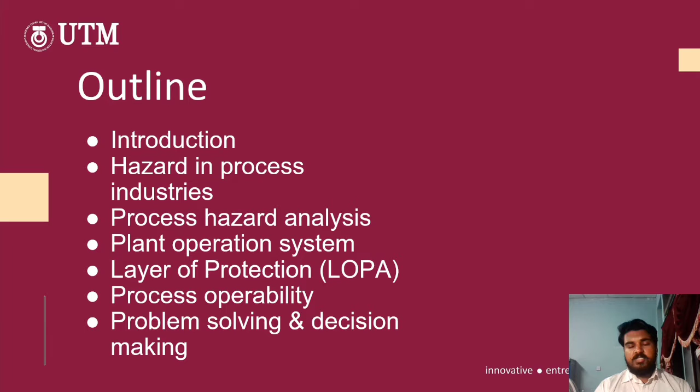The title for our project is the Torrance Refinery Explosion from ExxonMobil, and my group members are Logiswaran, Rohini, Tanweer and Sitinur Khaliza. This is the outline for today: I'll start with the introduction, followed by hazards in process industries, and lastly we'll end with problem solving and decision making.

For the introduction, the ExxonMobil Corporation was developed on November 30th, 1999. For starters, ExxonMobil focused on chemical-based products such as artificial rubber, catalysts, synthetic automotive oil-based stocks, and many more. Once further developed, ExxonMobil also started to produce jet fuel, diesel fuel, LPG, coke, and sulfur as well. The Torrance plant of ExxonMobil is actually the second smallest refinery worldwide.

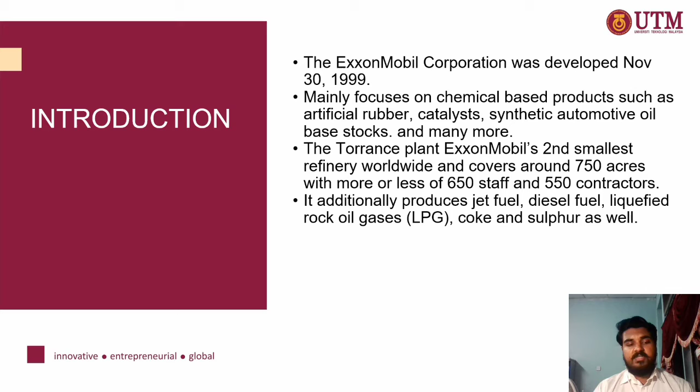It also covers around 750 acres with more or less 650 staff and 550 contractors working in that plant. This is the event timeline for the explosion.

The actual explosion took place on February 18th. However, the timeline initially started on February 11th. One of the expanders in the plant experienced a severe vibration problem, and the following day they cleaned the expander blades because they thought the catalyst buildup was causing it, so they removed the catalyst buildup.

However, the following day the expander had a similar problem, and this time they cleaned the blades, but unfortunately it did not reduce the vibration. On February 16th, the process flow through the expander was increased, which caused the vibrations to become worse, until it reached a high set point, and the FCC unit automatically shut down into the safe park.

This caused the catalyst inside the expander to not form a protective barrier, and the steam flow into the reactor is basically only a barrier to prevent the hydrocarbon from entering the air side of the unit. The following day, on February 17th, the ExxonMobil personnel decided to reuse the variance which was developed for the 2012 expander entry.

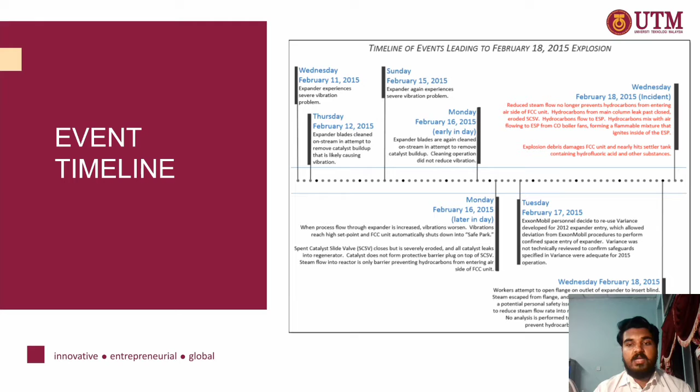Lastly, the explosion debris damaged the FCC unit itself, and it also nearly hit the settler tank containing high amounts of hydrofluoric acid and other substances as well.

Hi, I'm Khaliza, and I'll proceed with the hazards in process industry at the ExxonMobil refinery, Torrance, California. Next is the types of hazards involved in the accident, which are fire, explosion, toxic release, and physical. Fire can be produced from electrical sparks, known as one of the ignition sources, and this plant has very high potential to produce fire due to the process used to separate particles in the electrostatic precipitator.

For the explosion, it happened due to the back flow of hydrocarbon into the reactor, where the hydrocarbon mixed with the ignition source, the spark, producing the explosion. For the toxic release, due to the explosion, some debris of the ESP, or electrostatic precipitator, was found near the FCC and alkylation unit, where some of the toxic chemical, known as hydrofluoric acid, could be released.

Due to improper installation of the blinds at the reactor, this was the main factor causing toxic hydrogen sulfide to be released to the surrounding area. Due to the accident, 4 employees were injured, and due to the toxic release, it endangered nearly 150,000 residents due to chemical exposure.

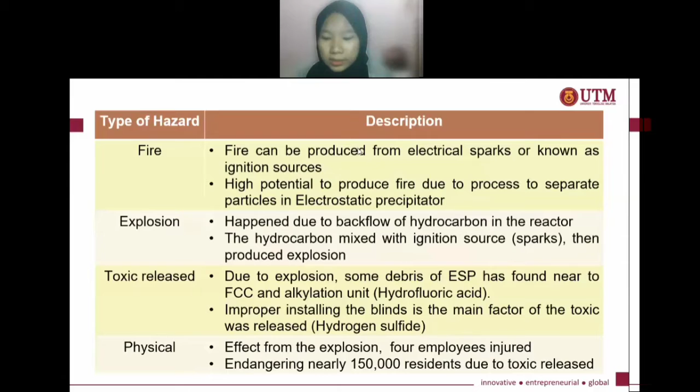So next, as you can see here, this data was generated using the Aloha software. For the IDLH, which refers to immediate danger to life or health, hydrofluoric acid has the lowest value at 30 ppm compared to hydrogen sulfide, and this is very dangerous. If you inhale the chemicals, it might cause death or serious injury. As shown at the bottom of the table, hydrofluoric acid is noted as very dangerous, as it can also react with water or water vapor. So that's all for my part.

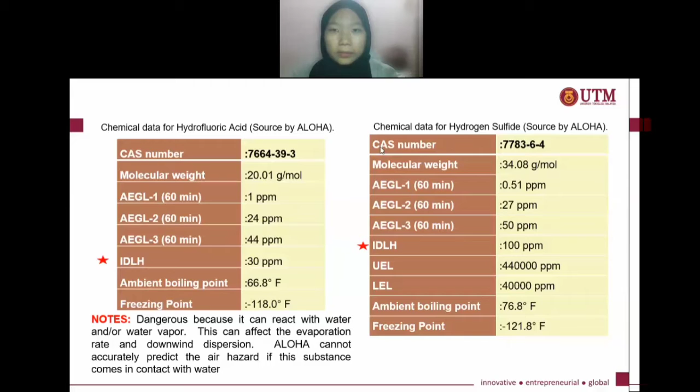Perform process hazard analysis on the ExxonMobil Torrance Refinery facility. Identifying dangers and hazards is fundamental for guaranteeing a safe design and operation of a system or unit in process plants. Process hazard analyses are essential for assessing the consequences of incidents, assessing the risks involved, and selecting the most appropriate preventive and protective systems.

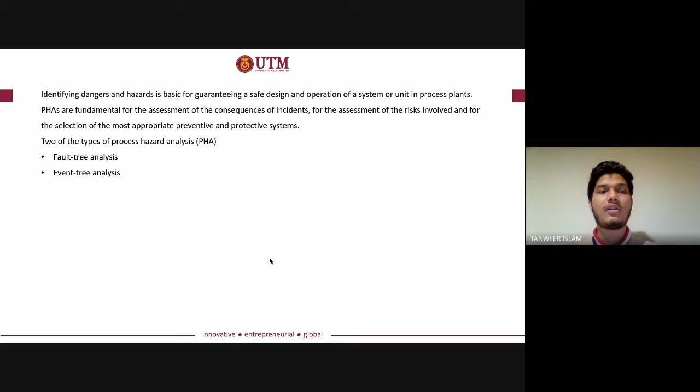Two types of process hazard analysis we are performing today are fault tree analysis and event tree analysis. For the fault tree analysis, as shown in the diagram, the explosion or ignition of the ESP occurred due to both air flowing from the CO boiler fans and the leakage of hydrocarbons through the eroded SCSV through the air side of the FCC unit.

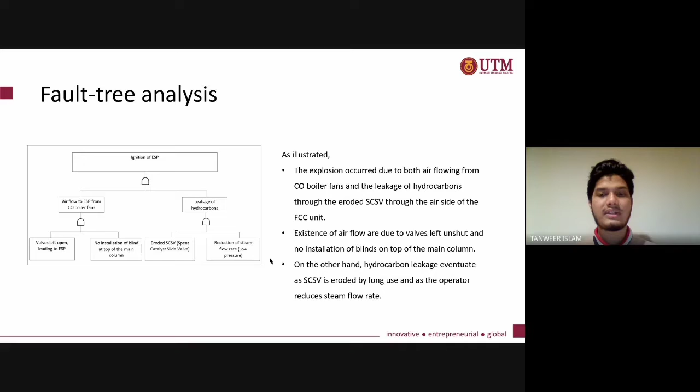Existence of airflow is due to valves left unshut and no installation of blinds on top of the main column. On the other hand, hydrocarbon leakage occurs as the SCSV is eroded by long use and as the operator reduces steam flow rate.

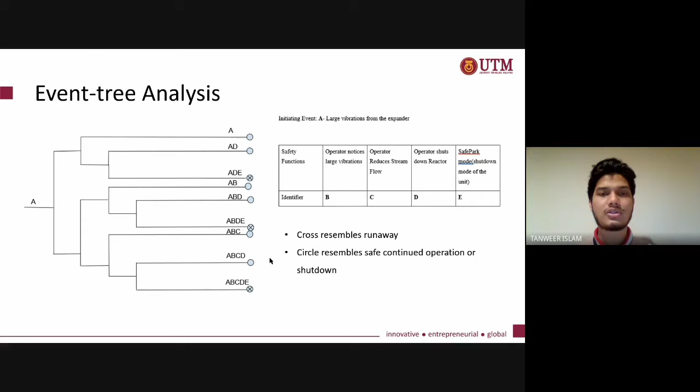For the event tree analysis, the initiating event considered is the large vibration from the expander, denoted using A. Identifiers B, C, D, and E are used for different safety functions as written on the table. As shown in the diagram, we have a possible number of consequences where a cross resembles runaway, and a circle resembles safe continued operation or shutdown.

A HAZOP case study has also been performed on the Torrance Refinery, specifically on the reactor and regenerator, where the parameters are similar, but for different guide words, deviation, possible causes, and actions are found. Similarly, a HAZOP case study has also been done on the expander and the gas catalyst separator.

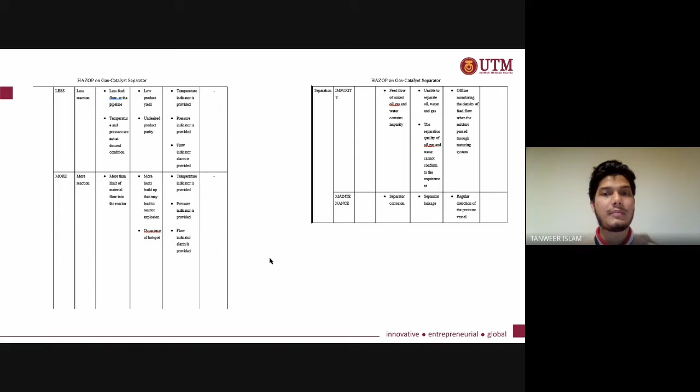For the HAZOP case study on the gas catalyst separator, the parameters chosen are flow, temperature, pressure, reaction, separation, and impurity and maintenance, where each of these will cover the deviation, the possible causes, and the consequences, along with the recommendations.

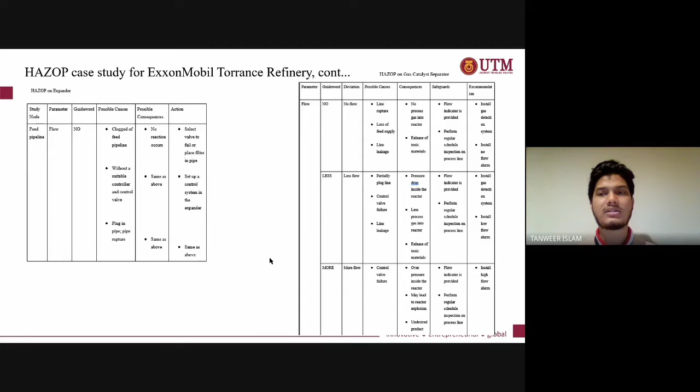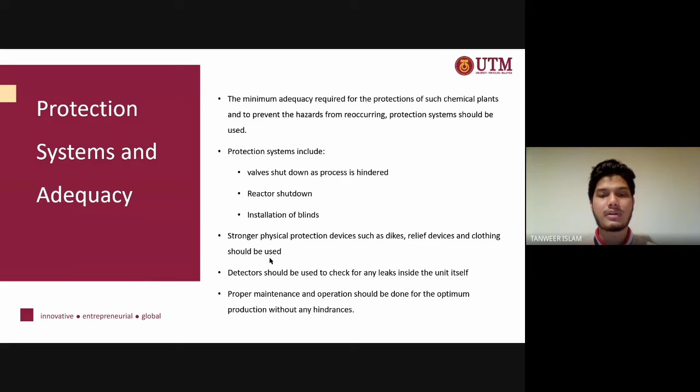The process of the FCC unit begins by feeding the reactor with heavy hydrocarbons, which then mix with catalyst. As the feed travels up the reactor, the heavy liquid hydrocarbons are converted into lighter hydrocarbon vapors. At the top of the reactor, the lighter hydrocarbon vapors are separated from the catalyst and then flow to the main distillation column. Meanwhile, the catalyst falls down from the side of the reactor through a slide valve into the regenerator.

During the reaction, a layer of carbon called coke, which forms on the catalyst, must be removed. In the regenerator, the coke on the catalyst is burned off with the addition of air. Finally, the catalyst is fed back to the reactor through the slide valve and the cycle is repeated.

On the other hand, it is critical that the flammable hydrocarbons in the reactor do not flow into the air side of the FCC unit because it might create an explosion. This is due to the presence of the electrostatic precipitator (ESP), located in the flue gas system. The ESP removes small catalyst particles using static electricity and will create sparks, a source of ignition, when being re-energized.

Due to the hazard potential, the system uses two slide valves connecting the reactor and regenerator to maintain the catalyst barrier between the equipment.

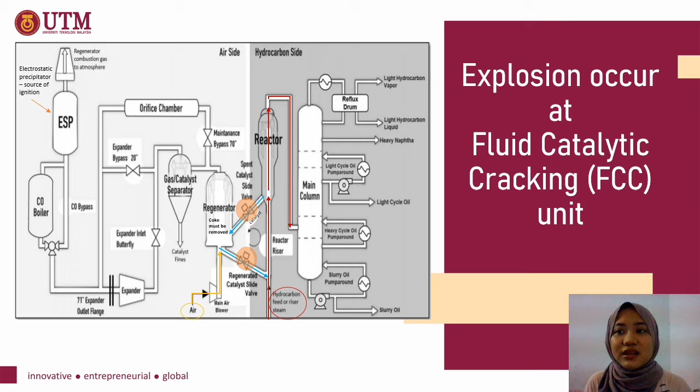The refinery system had implemented a safety shutdown system called SafePark, which automatically activates when an expander suddenly vibrates forcefully in the FCC unit on the day of incident. During SafePark mode, the flow of hydrocarbon into the reactor is turned off automatically, and then the flow of air into the regenerator is also stopped.

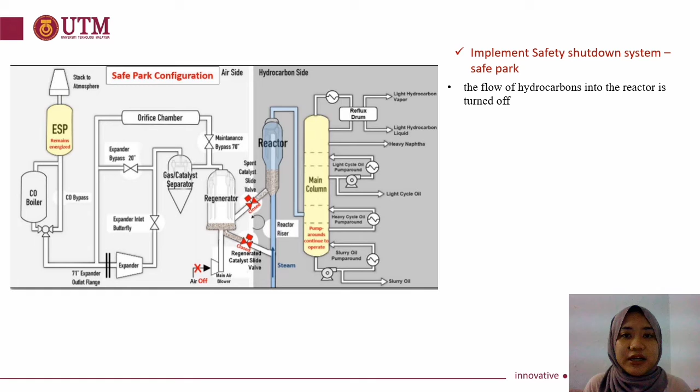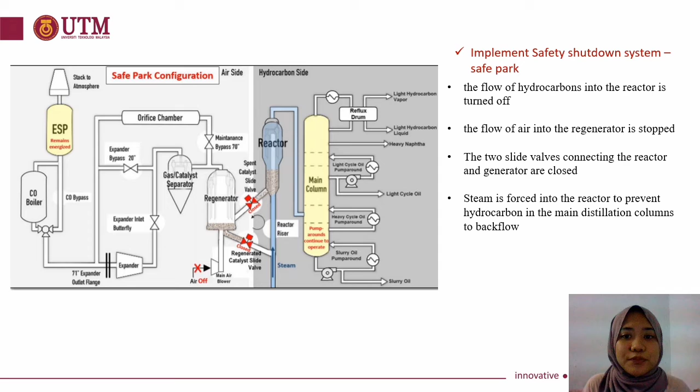The two slide valves connecting the reactor and generator are closed to ensure the catalyst barrier is maintained, and steam is then forced into the reactor to prevent hydrocarbon in the main distillation columns from backflowing. The ESP remains energized during safe park mode.

However, due to the function failure of one slide valve, which had eroded over 6 years of operation, the system could not maintain a catalyst barrier in the reactor. The valve failure allowed hydrocarbons to flow into the air side of the FCC unit, causing the explosion.

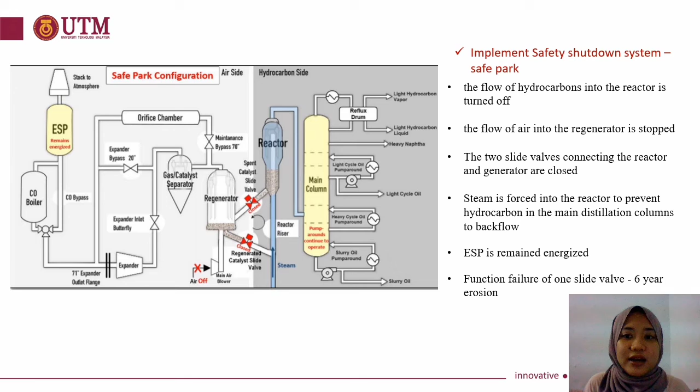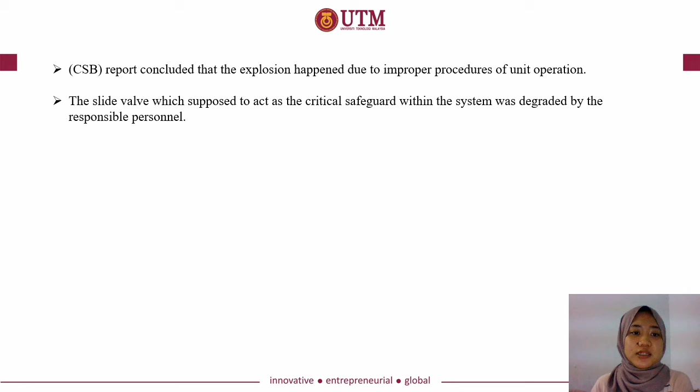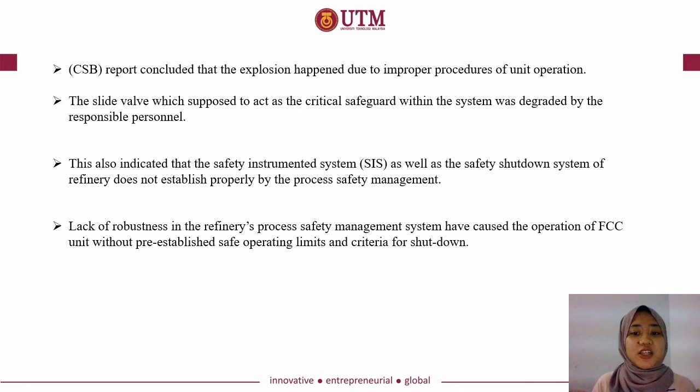The Chemical Safety and Hazard Investigation Board report concluded that the explosion happened due to improper procedure of unit operation. The slide valve, which acts as the critical safeguard within the system, was degraded by the responsible personnel. This also indicates that the safety instrumented system, or SIS, was not established properly by the process safety management. The lack of robustness in the process safety management system caused the operation of the FCC unit without pre-established safe operating limits and criteria for shutdown.

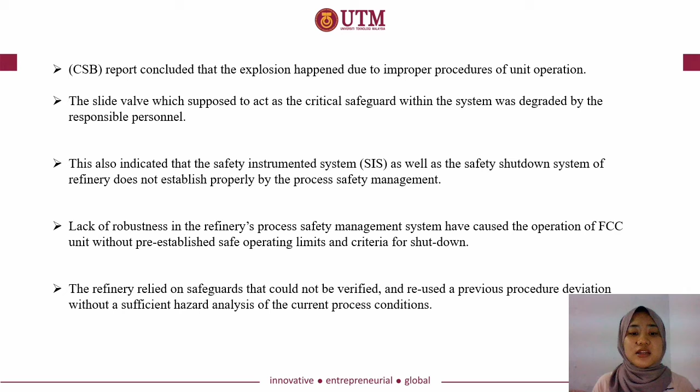And lastly, the refinery relied on safeguards that could not be verified and reused a previous procedure deviation without sufficient hazard analysis of the current process condition. That's all from me, thank you.

So now we are moving on to the layer of protection of ExxonMobil-Torrance Refinery. Let's see the available layers of protection at the incident site.

The first layer is the spent catalyst slide valve, which controls the spent catalyst flow into the regenerator. The next is the regenerated catalyst slide valve, which controls the flow of hot catalyst to the reactor riser, where it contacts, heats, and vaporizes fresh heavy hydrocarbon feed to begin the cracking reaction.

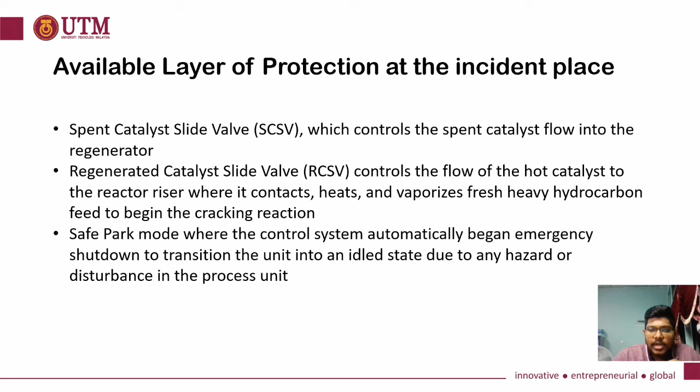Next is safe park mode. This is the mode where the control system automatically begins emergency shutdown to transition the unit into an idle state due to any hazard or disturbance in the process unit.

The occurrence of the explosion was not caused by the inability of the layers of protection installed in the refinery, but instead by the weakness in the ExxonMobil-Torrance Refinery's process safety management system.

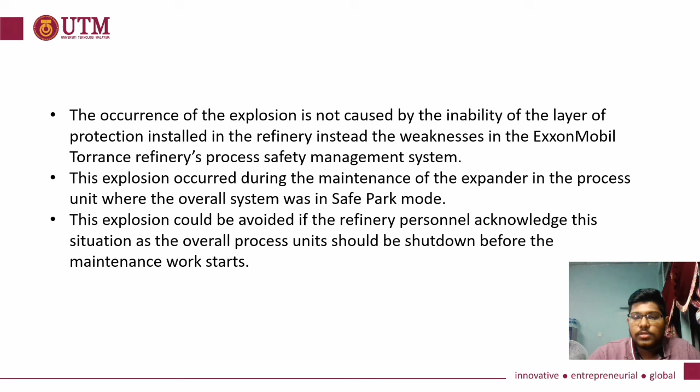This explosion occurred during the maintenance of an expander in the process unit, where the overall system was in safe park mode. This explosion could have been avoided if the refinery personnel had acknowledged the situation, as the overall process unit should be shut down before maintenance work starts.

So what improvements should be done? The layer of protection of the refinery was not the cause of this explosion, but the negligence of the higher authorities. The refinery personnel should be more aware of the conditions of the process unit, and regular checking of equipment should be done to make sure the equipment is in good condition.

The employer should document that equipment complies with recognized and generally accepted good engineering practice, and inspection and testing procedures should be followed, with frequency consistent with manufacturer's recommendations and more frequently if determined necessary by prior operating experience.

The higher authorities should respond immediately to reports made by their employees, coming up with a solution as soon as possible to avoid any consequences which can lead to fatalities. They also need to review the safety procedures and make sure they are compliant with new legislation.

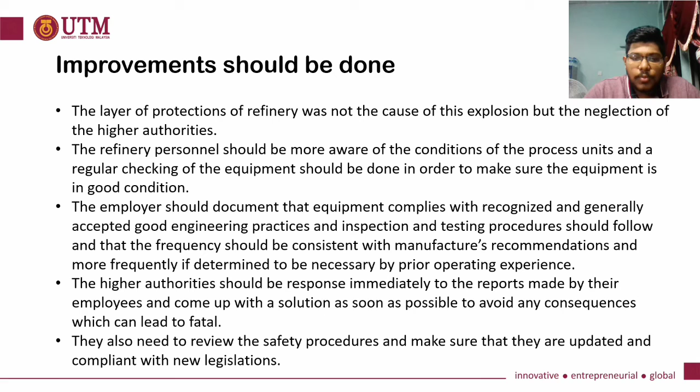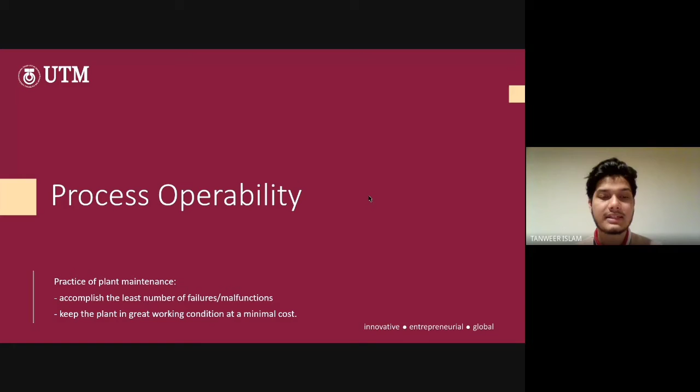So for the next part is process operability. The practice of plant maintenance is to accomplish the least number of failures and malfunctions, and to keep the plant in great working condition at minimum cost.

Plant maintenance systems also ensure the accessibility of machines, services, and buildings. Machines and facilities should also be kept at their ideal working capacity to be utilized to make the most profit with no interference.

Now, for the startup of chemical plant systems, the whole plant system should be flushed for any residuals or debris inside tanks, pipes, or any part of the inline systems. The feed quality and quantity is to be checked, re-verified, and tested along with all inline sensors, testing set points of interlocks, timing relays, and alarms.

Purge all air out of the system at low feed pressure and check the system for leaks.

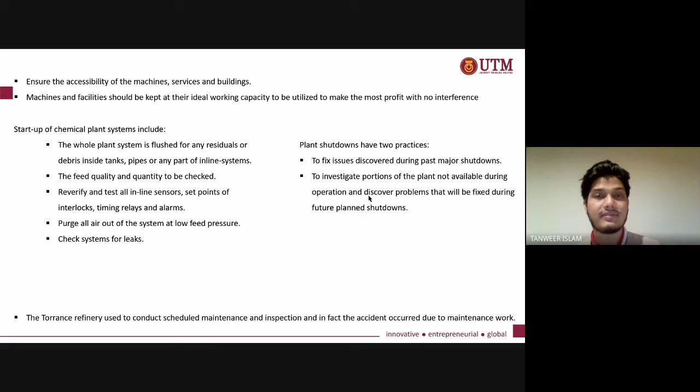The Torrance Refinery used to conduct scheduled maintenance and inspection, and in fact, the accident occurred due to maintenance work.

So this is the practice of the plant maintenance system in Torrance Refinery that we are going to see. But let's look at the steps that occurred which caused this explosion.

It started with catalyst buildup forming on the blades of the expander, causing large vibrations. Unsuccessful maintenance work was done to clean the blades, triggering safe park mode.

The spent catalyst slide valve is closed but eroded due to long use. Catalyst leaked into the regenerator through the eroded SCSV instead of forming a protective barrier on the SCSV.

Operators decided to open the flange, isolate the expander, and install a blind. Steam started to flow out of the flange.

Management decided to reduce the steam flow rate, which no longer prevented the leaking hydrocarbons from mixing with the air side. Thus, leaking hydrocarbons and air mixed to form a flammable mixture in the ESP.

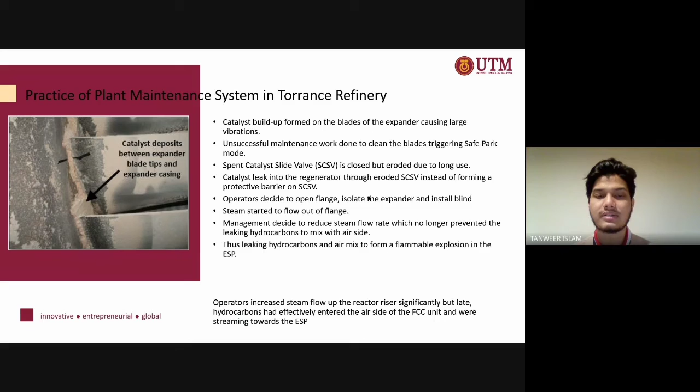Operators increased steam flow up the reactor riser significantly, but too late. The hydrocarbons had effectively entered the air side of the FCC unit and were streaming towards the ESP already. Now let's see the problem solving and decision making done by the refinery personnel.

First, the process troubleshooting. The key factor that contributed to the flammable mixture accumulating inside the ESP on the day of the incident is that ExxonMobil relied on indirect operating parameters to measure critical safeguards for the safe mode of operation. They relied upon operating parameters that did not signify the FCC unit was in a danger condition leading to the incident.

In addition, ExxonMobil had not developed a safe park procedure for how to safely operate within specified safe operating limits. ExxonMobil relied on a variance that had been developed in 2012 without verifying that the safeguards specified in the variance were sufficient.

Erosion damage that had developed over 6 years of operation likely compromised the SCSV, and it could not maintain a catalyst barrier while the FCC was in safe park mode.

Steam flow to the reactor had been reduced, likely causing a pressure deviation that led to leakage of hydrocarbons entering the flue gas system.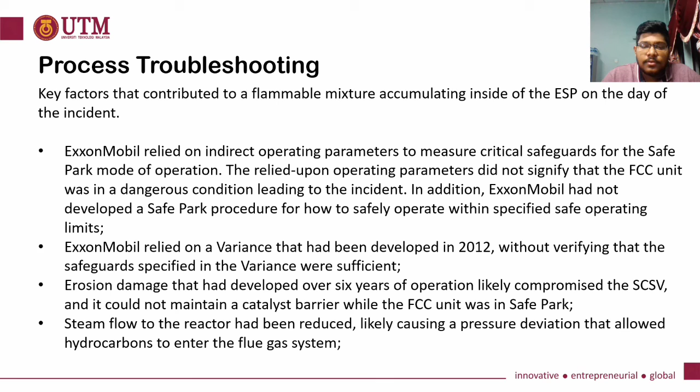A leaking heat exchanger in a slurry oil pump-around allowed light hydrocarbons to enter and pressurize the main column to a higher than typical pressure.

ExxonMobil did not shut down the FCC unit when it was identified that the SCSV leaked and had not established a catalyst barrier. The expander could not be effectively isolated while the unit was in safe park mode.

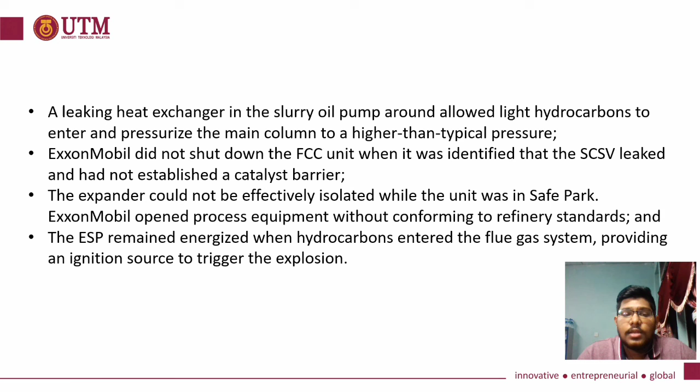ExxonMobil opened process equipment without conforming to refinery standards, and the ESP remained energized when hydrocarbons entered the flue gas system, providing an ignition source to trigger the explosion.

Next is the decision made and the precautionary steps implemented after the event. The refinery has implemented protective systems that prevent ignition of flammable gas, including hydrocarbons not in the presence of CO, inside the electrostatic precipitator for each mode of operation.

The refinery personnel required identification of all safety critical equipment, the consequence of failure for each mode of operation, and ensuring safety critical devices can successfully function when needed.

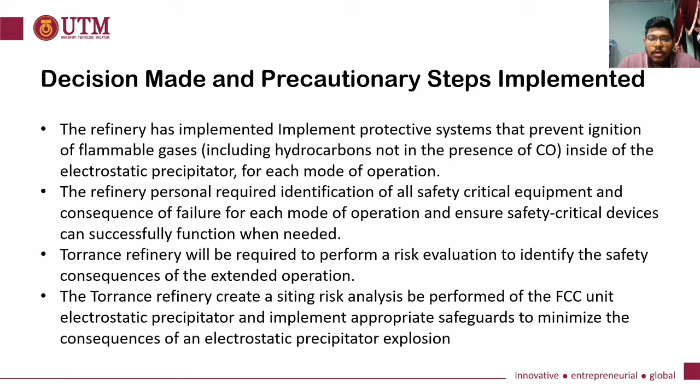Torrance Refinery will be required to perform a risk evaluation to identify the safety consequence of extended operation. The refinery also created a siting risk analysis performed on the FCC unit and electrostatic precipitator, and implemented appropriate safeguards to minimize the consequence of an electrostatic precipitator explosion.

In conclusion, as you can see here, safety at the working area is very important as it will impact our health as workers and also people surrounding us.

Poor management, improper process design, and lack of safety training towards the worker will actually lead to incidents happening. In order to operate any plant, we need to have proper management and also give a lot of training, especially safety training, to our workers, so we can avoid any accidents from happening.